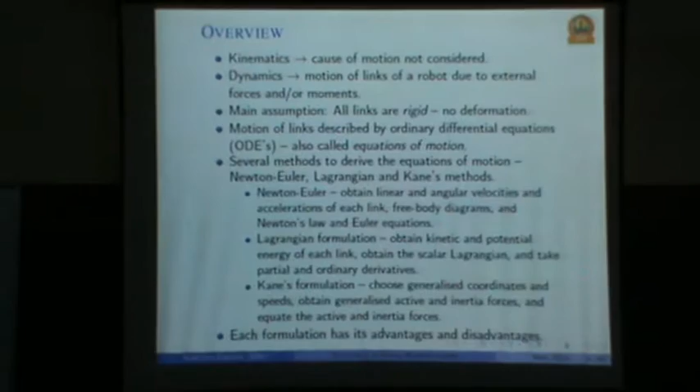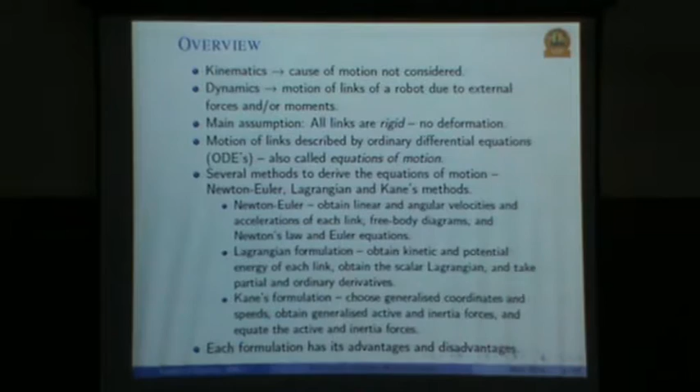Just a little quick introduction. This is maybe a repetition of what Professor Isaac Kurian had also discussed. So in robotics, or like in any other machine design or mechanism design, mechanism analysis and design problems, we first look at kinematics, which is basically looking at how the bodies are moving. We do not really consider what is the cause of the motion. The next important thing is dynamics, in which basically we want to find out, for the links of the robot - since a robot is made up of rigid bodies connected by joints - how the motion of these links changes when some external force or moment is applied.

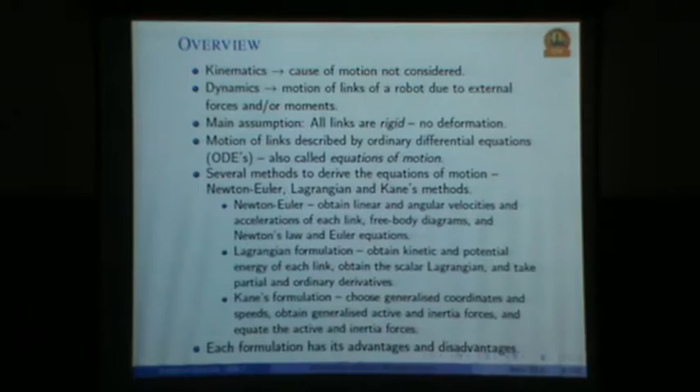The main assumption in this set of talks is that the links are rigid. They need not be rigid, they can be flexible, but then the equations of motion are much more complicated. Once you make an assumption that these are rigid, you will derive what are called ordinary differential equations, whereas if you look at flexible links, something else will happen.

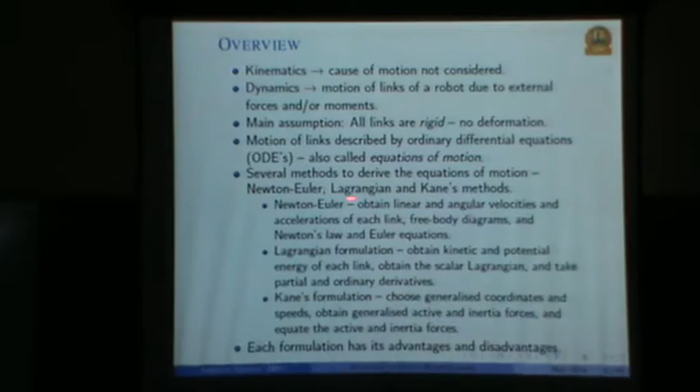These are also called equations of motion, and there are various ways of deriving them: Newton-Euler method, Lagrangian, and Kane's method. In Newton-Euler, basically we look at what we do in high school physics. We draw free body diagrams, find the linear and angular velocity, find forces, then apply F equals ma and the equations of motion. These are called Newton's laws or Euler equations.

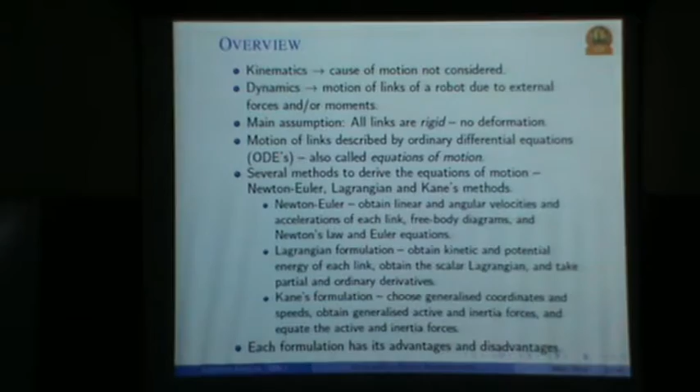Whereas in Lagrangian formulation, this is an energy-based method. We derive the total kinetic energy, maybe the potential energy, various other forms of energy. If you want to include friction and so on, you can do it. The basic idea is that we get a scalar quantity, a single scalar. Then with that scalar, we do a set of steps, like a recipe. We have to take certain derivatives in some particular way and then assemble.

Hence some people find Lagrangian much easier. Whereas with Newton-Euler, you have to find out direction of forces, vectors, velocities, and various things you need to consider. There is also a Kane's formulation, which I don't want to get into. Each formulation has its own advantages and disadvantages. If you were to do Newton-Euler, you have much better idea about the directions of velocity and forces. You can also include friction and various other things which are not so easy in the other two formulations. It can be done, but it is easier in the Newton-Euler method.

So I am going to do only the Lagrangian formulation today. If anybody is interested, we can discuss further. There are lots of textbooks, and it is also available on the NPTEL website.

There are two main problems in robot dynamics. One is called the direct problem, which is basically where we want to obtain the motion of the links given external forces and moments. The other is the inverse problem, which is exactly the opposite. If I give you the motion, if I tell you the robot is moving with so much velocity, so much speed, and rotating and so on, how do I find what the joint torques and forces are?

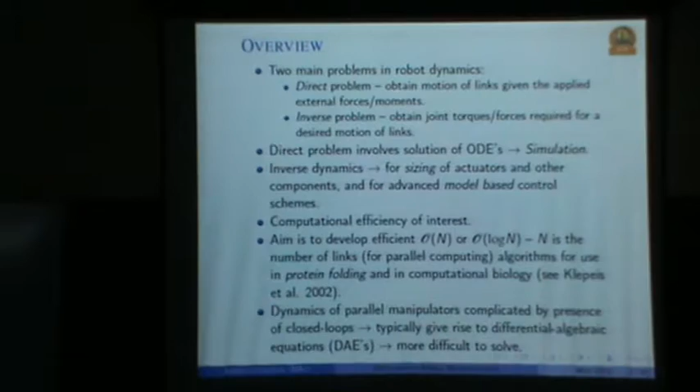The direct problem involves solution of ordinary differential equations. You have to numerically integrate certain equations of motion, because most of the time you can't solve them analytically. You have to use a computer, and this is called simulation. If you want to solve the simulation problem, you have to solve the direct problem.

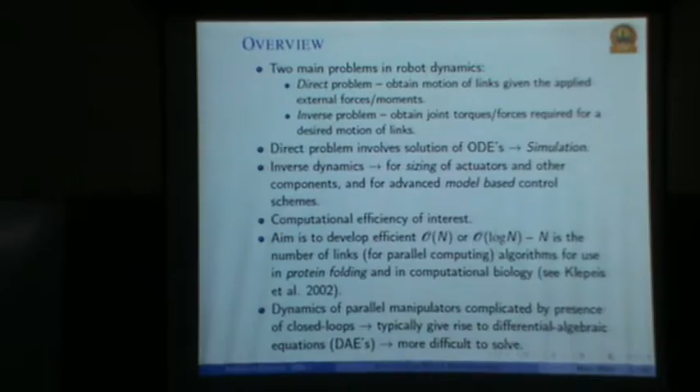Inverse dynamics, on the other hand, is basically used as a design tool. If I know that my robot is going to do such and such task, it has to go pick up, put something in between, attain so much velocity, so much acceleration and so on, then I solve the inverse problem to find out how big the motor should be, how much torque is required from the motors. It is a very useful problem, also used for model-based control, which we will do tomorrow morning. So you can use the inverse problem to do control.

The key interest in all these dynamics problems is computational efficiency. We can get equations, so many equations. The important challenge, which is now more or less solved, is to find out how efficiently you can simulate these equations of motion, how efficiently you can solve the inverse problem. In computer science language, they talk about this complexity. If you have n links, say a 6 degree of freedom robot with 6 links, or a much larger robot with many other links, what is the computational efficiency?

What we are looking for is linear complexity. This means I want the number of computations to increase linearly with the number of links. If I have 6 links, I do so many multiplications; if I have 7, I do so many extra. How does it scale? Linearly. That is what we are looking for.

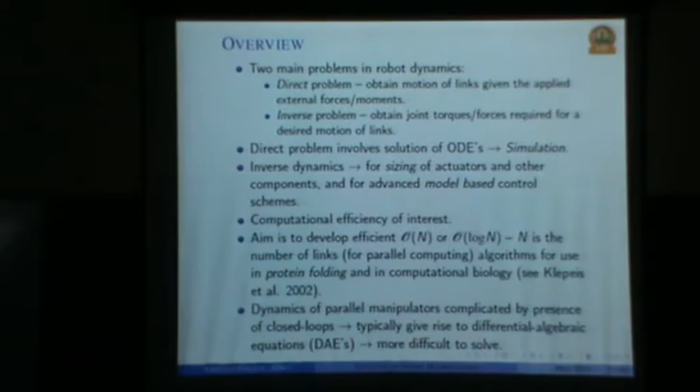You can also do log n, in which case you have to use parallel computing, but we will not discuss that here. I will not discuss this, but just to tell you that everything is not always linear. If you have a parallel robot, which I'm sure will be discussed tomorrow or day after tomorrow, you don't so easily have linear complexity. You also don't have only ordinary differential equations—you get what are called differential algebraic equations, which are much more difficult to solve.

So what do we need to form these equations of motion? One of the most important things is to represent mass and inertia of each of these links—the rigid bodies which make up the robot.

And what is mass? We all know. So if you have some strange shaped link, how do we find out mass? We know the density, we know the volume, and we can find out the mass of the rigid body.

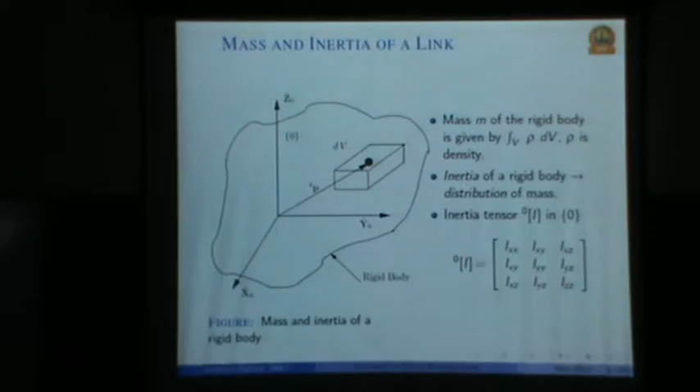Similarly, how do I find out inertia? For inertia, there is a little bit more complication. Inertia is always with respect to a coordinate system. So you have to say with respect to this particular reference coordinate system, I have this Ixx, Iyy—these are all well known, so I'm just repeating it very quickly. There are formulas for Ixx, Iyy, which is well known. For example, Ixx is the integral of y square plus z square dv, and so on.

The important thing to note is this inertia is a tensor. As I said, you need a different coordinate system—if you find the inertia in one coordinate system, let's say with respect to the CG of the object, it will be different if it is with respect to another coordinate system. But every time, it is always a positive definite and symmetric matrix.

So there are reasons—if it were not so, what would happen? You would have lots of problems. If it is symmetric, then you can show that you will have what are called principal moments of inertia, which are also positive. So I can have Ixx star, Iyy star, and so on—these are the principal moments of inertia.

So if you look at the back of some old mechanics book, they will say a rod has half ml squared, or 1 by 12, or 1 by 3 ml squared, or something like that. Those numbers are basically the principal moments of inertia about, maybe, the center of the rod or about some other axis, and we can find that those are always positive quantities.

And how do we find the inertia of an actual robot part? So basically what you do is you see what this robot part is made up of—maybe it's a tube with some holes, or a box with some holes with a motor attached. We can find out the inertia of this entire link with whatever else is there by using some tricks.

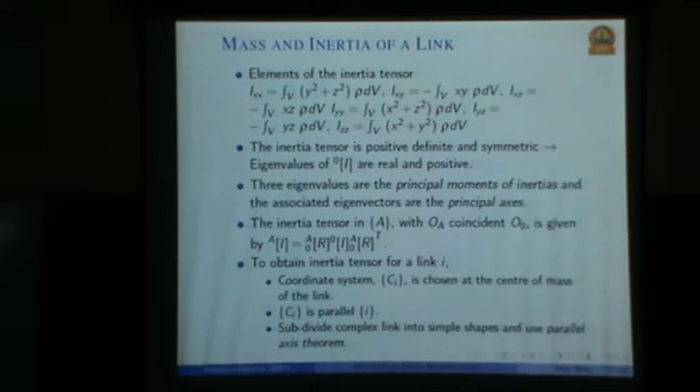Okay, so once you have the mass and inertia, then we can look at how to derive the equation of motion. I'm going to use the Lagrangian formulation, and this is how it goes. It's an energy-based formulation involving kinetic and potential energy.

So what is the kinetic energy for any link, any single link of the robot? It is nothing but half mv squared plus half I omega squared. It's written in this strange form, but otherwise it is just a basic idea of what we do from PoC or even high school.

So we can find the mass of that link, we can find the linear velocity of the CG of that link, we can find the inertia matrix of that link, we can find the angular velocity of the link, and you just compute this.

There are some tricks. Professor Kurian must have told you about how to find the linear and angular velocity of the origin of the coordinate system. So when you go from one link to another link, you can find out the linear and angular velocity.

There are formulas where you can do what are called propagation. If you know the first link, I can find out the second link, from the second link I can find out the third link, and so on. So there are these propagation formulas for linear and angular velocity, but they are for the origin.

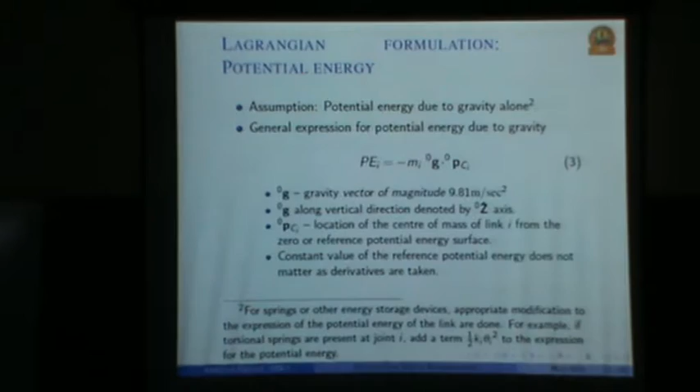And what is this quantity dependent on? It depends on the joint variable. Remember, the angular velocity depends on theta dot if it is a rotary joint. The linear velocity will depend on the velocity of translation at the joint, so some d dot will come in. This is the DH parameter, theta and d, as was discussed.

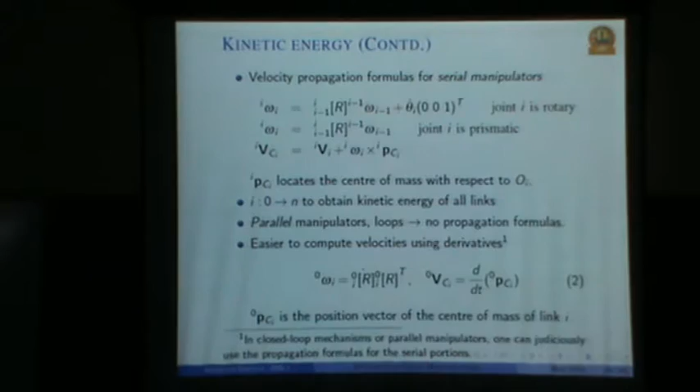So eventually this quantity is a function of q, which is theta and d, and q dot, which is theta dot and d dot, along with mass, inertia, length, and other things assumed constant. So we have a big function here, and n is the number of links.

In a serial manipulator with only rotary and prismatic joints, the number of q, called the joint variable, is the same as the number of degrees of freedom, same as the number of links n, most times - why would you build a robot with no motor or joint? So, the Lagrangian formulation says you do these partial derivatives: dL by dqi, then dL by dqi dot, and then take the time derivative of all these things.

For every link I will get something here, d by dt of something, and on the right hand side I equate it to external forces and moments acting at the joints—these are the joint torques or joint sliding forces. If I do this, I get n equations, since I have n links, i equals 1 through n, and I equate all of these. So it's a very simple recipe.

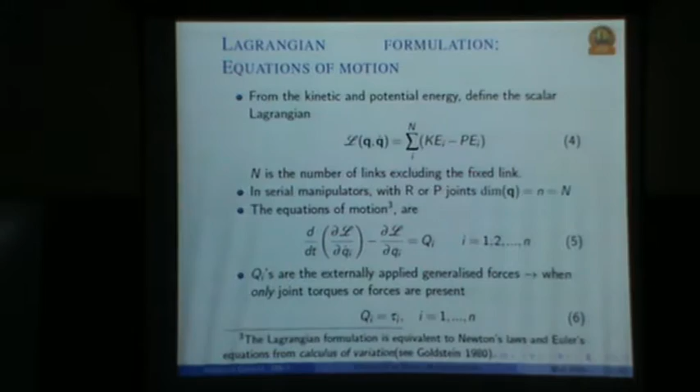So once I have done this for each one of these links, i equals 1 to n, now comes the interesting part. I can organize all these equations in a standard form—all serial robots' equations of motion can be written this way. That is a very nice property of equations of motion for a robot.

So what do we have? I have something called the mass matrix—an n by n matrix—multiplied by q double dot. Q double dot is like theta double dot or d double dot, the second derivative of the joint rotation or joint translation. I also have one term which is a matrix multiplied by q dot.

This is called the centripetal and Coriolis term. If you recall mechanics, you'll have something called omega square r, or 2 omega cross v. These are terms that come from derivatives—when you take omega, the Coriolis term, acceleration—so all the Coriolis and centripetal terms are here.

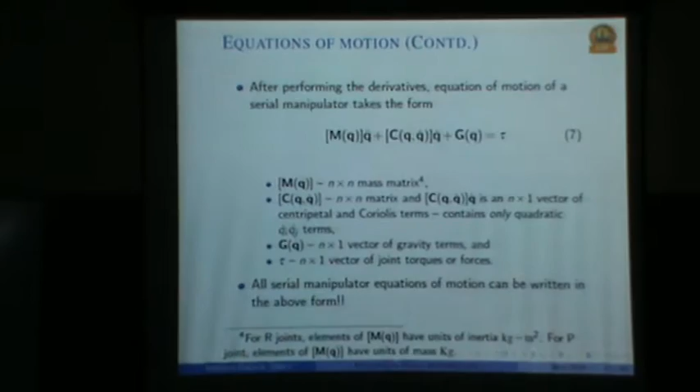This g of q is called the gravity term, coming from the potential energy, and the right hand side is torque. So every single serial robot can always be written in this form—there is no exception. I have an n by n matrix, another n by n matrix, an n by 1 vector, and the torque term.

So now people have worked on this—they know that all equations of motion are always of this form. So if you know all the equations of motion are of this form, why would you want to take all those derivatives? It's a pain—you have to do it by hand, be careful, and make sure the derivatives are done properly. Instead, we can go back one more step.

If you look at the kinetic energy, people have shown it is always in this form. I found the kinetic energy of each link—link 1, link 2, link 3—and added them all up. Then you ask a computer, or write a small program, to collect the terms in this form: q dot transpose into M into q dot. You collect and remove all the theta double dot or theta dot terms and write the kinetic energy this way, and this mass matrix turns out to be the same as the one derived earlier. So I don't have to go through all those steps—directly from the kinetic energy, I can find the mass matrix.

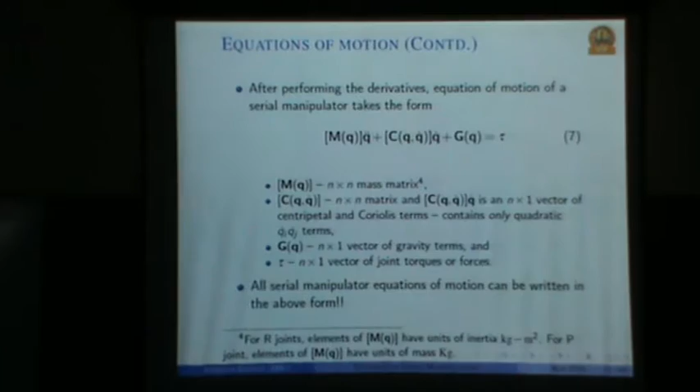And the gravity term is nothing but take the total potential energy and take the partial derivative. So without doing the d/dt and so on and assembling it, directly from the kinetic energy and directly from the potential energy, I can find out the terms in the equations of motion. And this is true for all serial robots. It is not just for 2 link or 5 link, it could be 200 links also, doesn't matter.

So in math, if you have done any advanced course in math, this is a very important part in what is called differential geometry. So in differential geometry of curves and surfaces, you will get these Cij terms. These are called Christoffel symbols. So somehow geometry and math and dynamics are all related in some sense.

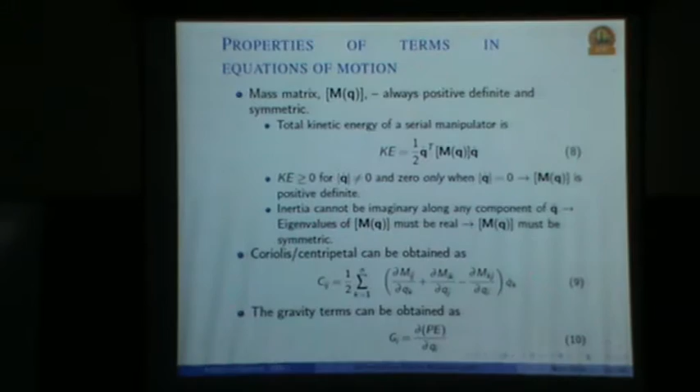Just very little, I don't want to go into too much detail because Professor Madhupad will do all these things tomorrow. If you are doing parallel robots or mechanisms, you can extend this Lagrangian formulation to derive equations of motion for those also. Because it doesn't make sense that I have only one formulation for serial robots which does not work for parallel robots. Then people will say, what is the use? It is too narrow and focused.

So if you have a parallel robot or a mechanism, you get what are called loop closure or constraint equations. In a 4-bar mechanism, you go around the loop and come back to the same place. That is called a loop closure equation or constraint equation. So if you have m constraint equations, you can extend the Lagrangian by taking the old Lagrangian and subtracting this quantity lambda j into eta j q. From the loop closure equations, multiplied by what are called Lagrange multipliers, you subtract it, and then you get a new Lagrangian, and again you can take all those derivatives and find the equation of motion. This is a nice way because it is extendable.

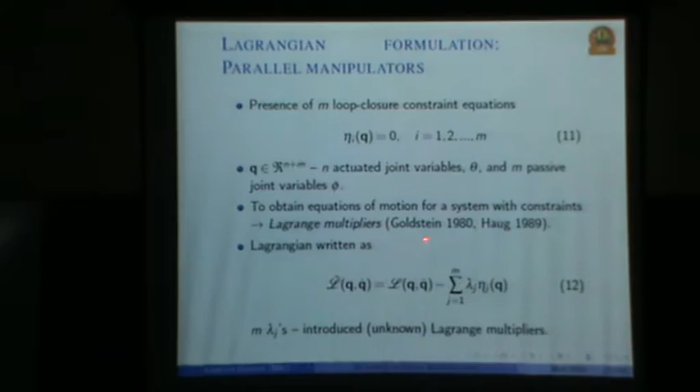Those of you who are interested in Lagrange multipliers, their properties, and how we can derive the new Lagrangian, you can go back and see some very well-known standard textbooks.

Once you have the equations of motion, again you do all these things, and what you will get is the left hand side looks very similar, the right hand side, one part is very similar, but then one new matrix will come which is related to the constraint equations. Some of these slides are taken from the NPTEL lecture, where I also discuss serial and parallel robots at the same time, because it's a unified way of looking at everything. So don't worry what is K and K star, they come from the loop closure constraint equations. You can find out what this K and K star are from this, assemble them together, and you have to add one additional term for parallel robots.

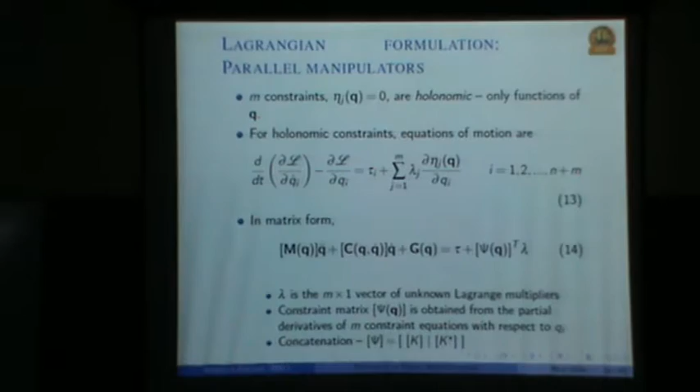I'm going to skip this for the moment. We can come back to it a little later.

So basically, the summary in serial robots is that I can find the equations of motion, and I can extend it to what are called holonomic constraints and loop closure equations.

What are the problems in Lagrangian formulation? We should know the limitations of any method. One important thing is it does not contain friction or any other dissipative term, and that is because Lagrange was a very famous mathematician. How many of you know who Lagrange is? He is from the time of Newton, Lagrange, Euler and so on.

In those days they were working on how the planets move around the sun. All of this comes from orbital mechanics and planetary mechanics. So what is friction there? If the Earth is spinning around the sun and rotating, there is nothing to do with friction as such. So there was no way to include dissipative terms.

But we need friction. In a robot, every joint, every motor has some friction in it. Otherwise the robot will move around forever. We give some voltage and it should keep on moving - that doesn't make sense. So how do we modify this very nice formulation to include friction?

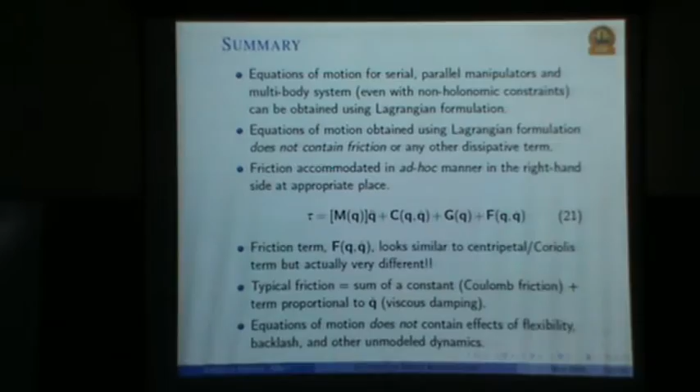It also does not contain anything to do with flexibility, backlash, or any other dynamics which you have not modeled. It is a very basic system for a conservative system where kinetic energy and potential energy are there, and nothing else. So if the robot is moving inside water, how will you model the force felt by the robot when it is dragged? You can't - you have to add it manually in an ad hoc manner.

Or if there is a gearbox in your robot and the gearbox has backlash - meaning you rotate one way and it rotates, but when you go back, nothing happens for some small angle - how will you model that effect? You can't. The normal Lagrangian formulation does not allow you to take into account all these things. You have to do it manually.

So I am going to stop here about this formulation. Is there any question? Then we can go forward and look at some examples and simulation, which will be much faster.

In which cases do we have to take the viscous damping? Yes, so if you want to include friction - viscous damping, Coulomb damping, any other kind of damping - you just have to add it to the right hand side.

Is this clear? Very basic, but I thought I'd give you some basic idea which can be extended. There are lots of books and notes you can go through in detail. So let's go and see some examples.

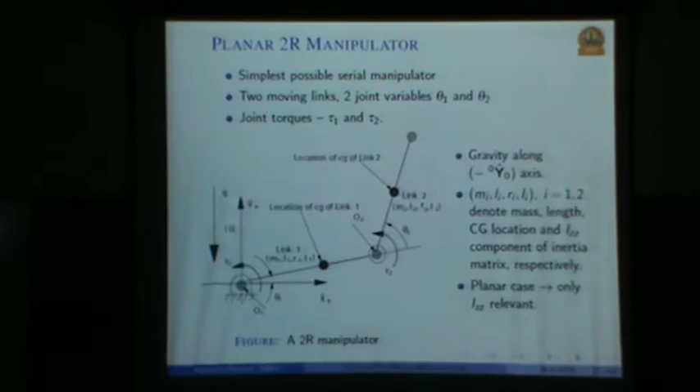What exactly happens when you apply this formulation to a simple robot? What is the simplest possible robot? This is what we do in class, because in a class I cannot draw a 6 degree of freedom robot and derive its equations of motion. If I start in the morning, it will take about 3-4 hours, and everybody will fall asleep.

So the simplest possible robot is this 2 degree of freedom robot, with one link here and another link here. Each link - for example, link 2 - has mass m2. The location of the CG is at R2, the length is L2. This is a planar example, meaning the links move in a plane. So if the links are moving in a plane, then only the IZZ component is important.

There is no need to worry about IXX, IXY and so on - only the IZZ component is important. So I2 is IZZ2 of this link. Similarly, for the first link you have M1, L1, R1 and I1.

So let's try and derive the equation of motion for this simple 2 degree of freedom planar robot. If you go back and see, this link, what is the angular velocity of this link? It will be related to theta 1 dot, right? This link is rotating by some theta 1. What will be the angular velocity of this link? It will be related to theta 1 dot and theta 2 dot.

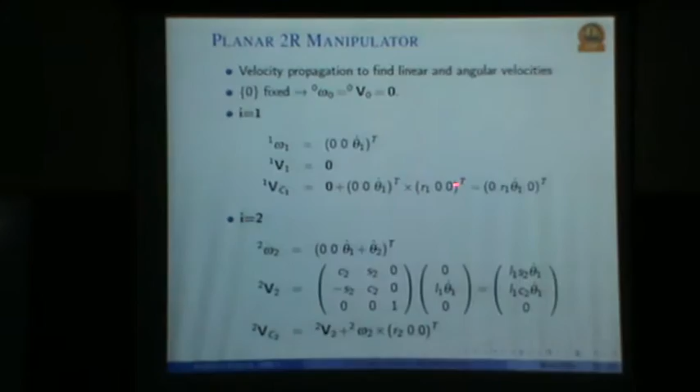The origin is here, of the links. In DH convention, the origin is always at the joint axis, it is not at the CG. So linear velocity is still 0. What about the linear velocity of the center of mass? It is 0 plus omega cross r, whatever I told you, and you will get this term.

For i equal to 2, what happens? Angular velocity will become theta 1 dot plus theta 2 dot. Linear velocity is this, and linear velocity of the center of mass is this plus omega cross r. It's very straightforward, it is automated. Then kinetic energy: if you derive it, it is half v1 squared m v1 squared plus half I omega squared plus half I2 omega squared plus half m v2 squared. These are the 4 possible terms, and it turns out that you will get this.

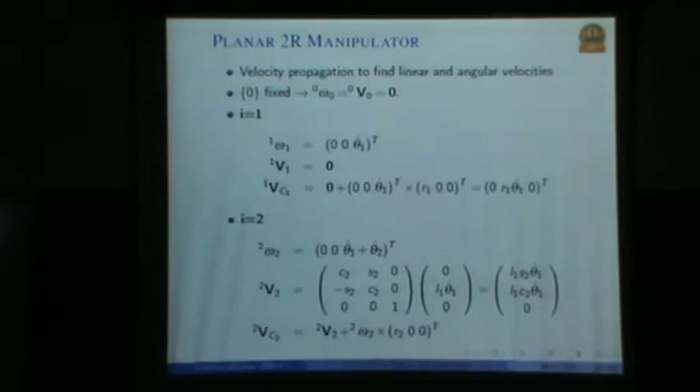So what is the key thing here? Theta 1 dot is there, theta 2 dot is there, but also C2, meaning cos theta 2, will appear. Why is cos theta 2 appearing? Let's go back to this. If theta 2 is such that this link is folded here, then the linear velocity of the link will be much smaller than if it is folded completely outside. So the linear velocity of the center of mass changes with theta 2, which you can see here, and that comes out in this expression.

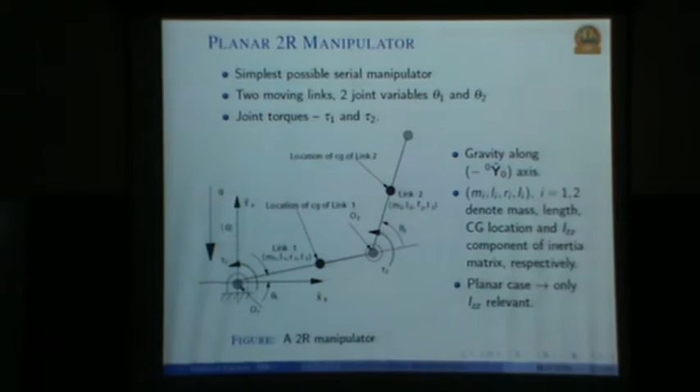Potential energy: let's go back and see this. This is 0, this height which is r1 into sine theta 1, and this height from here to here which is sine theta 1 plus theta 2. So you will get something which is in terms of sine, whereas the kinetic energy has cos. That is all I wanted to point out. So you will get some mgh plus mgh and so on.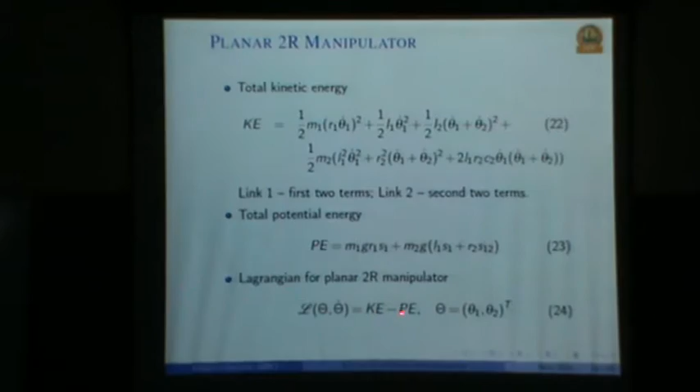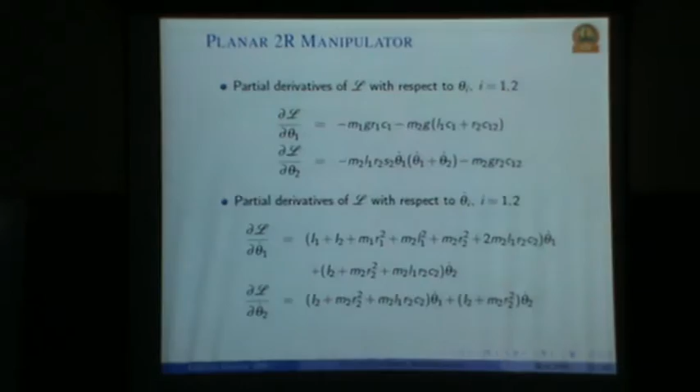So once we find the kinetic and potential energy, we form the Lagrangian. This is very straightforward, and then you take all these derivatives. This is very mechanical. If I take the derivative with respect to theta 1, I will get this, theta 2, theta 1 dot, theta 2 dot, I will get this, and then d by dt you get this, and then finally assemble. How do I assemble? I assemble keeping in mind that finally I want to write m into theta double dot plus c plus g.

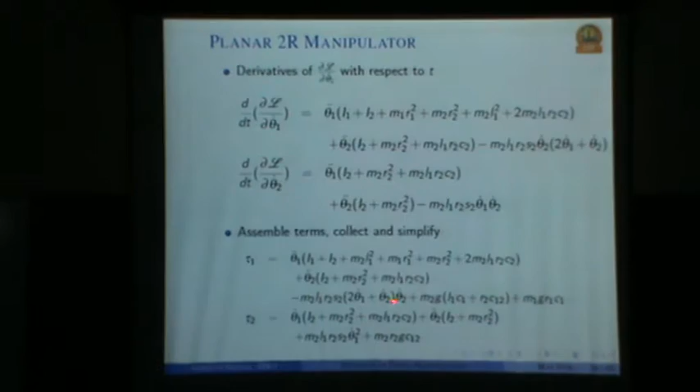If you were to write this, I will get theta 1 double dot into something, theta 2 double dot into something. These are the Coriolis terms. You will get something like theta 2 dot squared, and something like theta 1 dot into theta 2 dot. Similarly for tau 2. So this is the equation of motion. It's very straightforward and simple. You can derive it in class and show it.

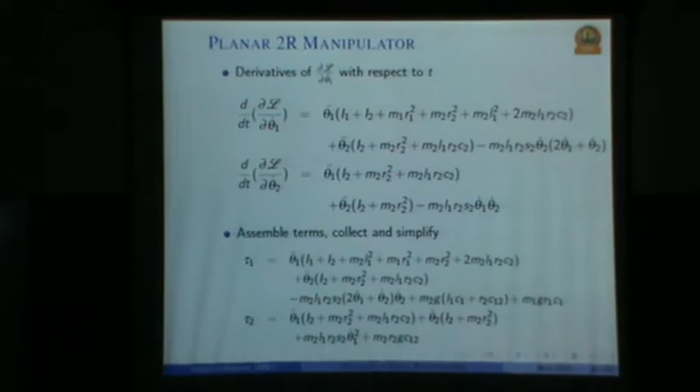And you can organize it this way, and show that this is the mass matrix, this is the centripetal term, this is the gravity term, and so on. No friction is there because the friction was not modeled.

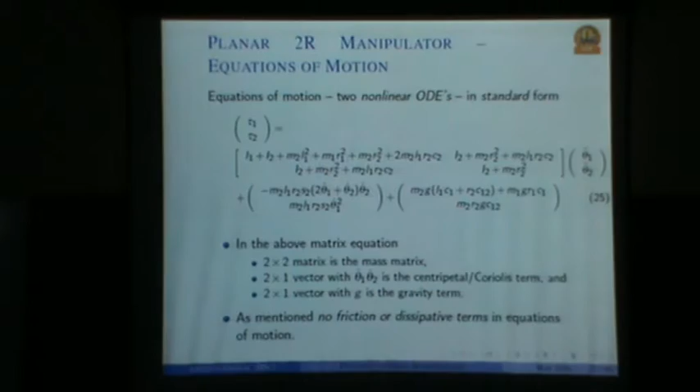So what do we do with this equation? There are two problems which we want to solve. We want to find out, given the torque—in this case the two motor torques tau 1 and tau 2—how the robot moves. Or secondly, if I give a path, find out how much torque is required to make it move on that path. That is called inverse dynamics and simulation.

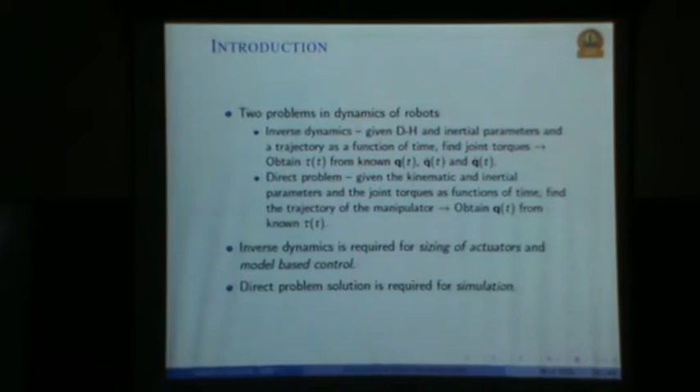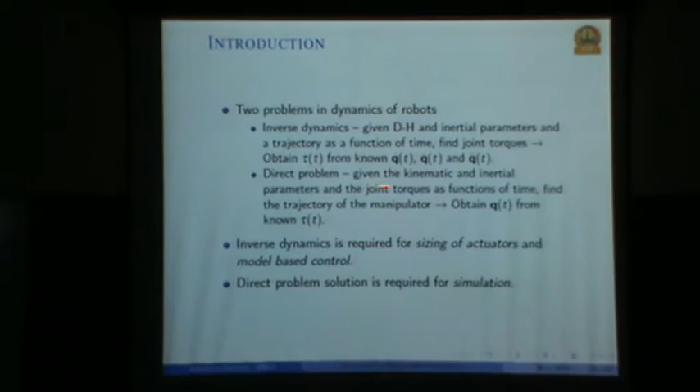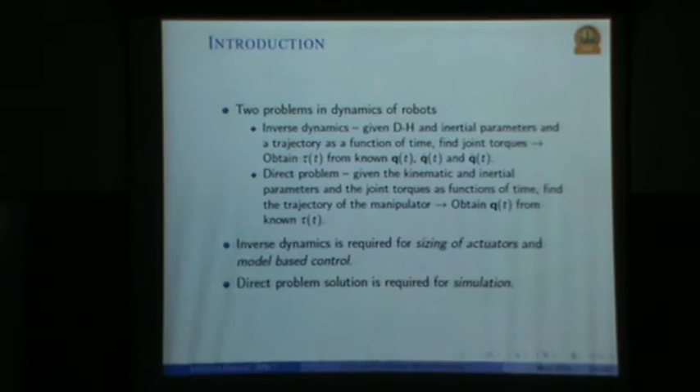So let's try that. Inverse dynamics: rephrase the problem. Given DH and inertial parameters, and the trajectory as a function of time, find the joint torques. Direct problems: given kinematic and inertial parameters, obtain q of t from this. So this is, as I repeated right in the beginning, this is for finding out what size motors to use, and this is to show actually how it moves.

Inverse dynamics is very simple. Why? Because you are given q, q double dot, q dot—everything—the right hand side is just given. As I said, the trajectory is given. I want to move the first joint at constant velocity, the second joint in some particular form, and hence I know exactly what q as a function of time is, theta as a function of time is. So all you do is just substitute and put it on the right hand side, and you quickly get the torque.

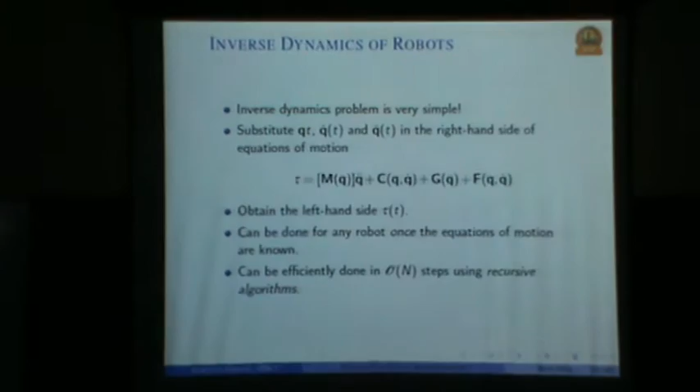And as I said, I can do this very, very efficiently. You can do it in O(N) steps, and you can prove that for inverse dynamics, the Newton-Euler formulation has a nice proof which says that it is always O(N) steps. It's a linear complexity problem for a serial robot.

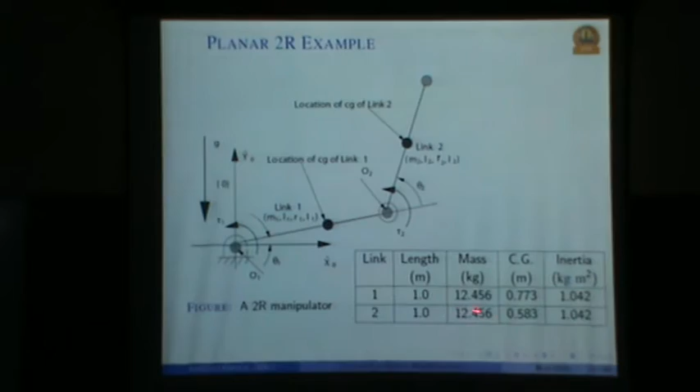Okay, so let's take an example. Here are some numbers. Now you have to use some numbers: the length of each link is 1 meter, mass is 12 kg. This 12 comes from the fact that there was actually a robot which was built. The first link of a robot is normally quite heavy, and its inertia is quite big, and so on.

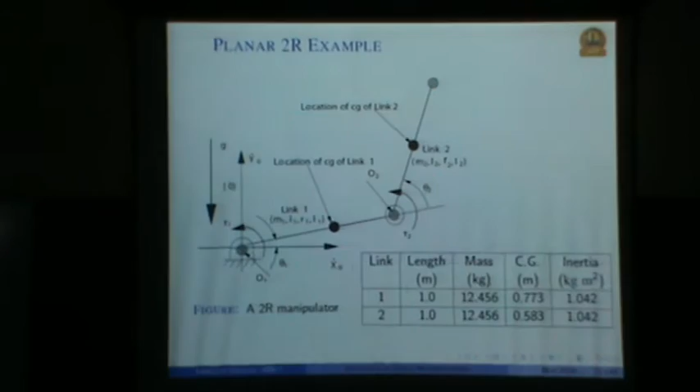So if I want to trace the tip of this robot on a circle, let's say I choose x as some a plus r cos phi, y as some r times this, and so on, and I want to make this robot trace this circle constantly in some time. You have to choose some numbers right now. So I want to know, for this particular trajectory, what are tau 1 and tau 2.

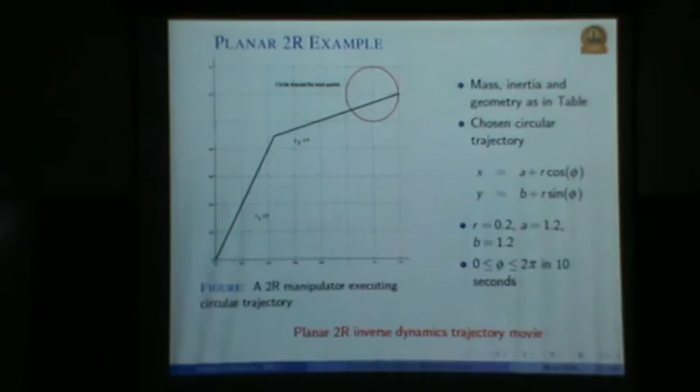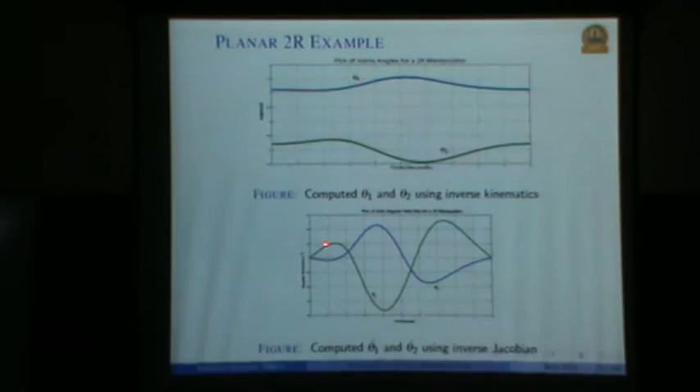So I can just substitute on the right hand side and then we get this. Here is the plot: theta 1 as a function of time is this, theta 2 as a function of time is this, theta 1 dot as a function of time is this. These are given to you, and then this is what torque you will get. So if my robot's job was to trace this circle in this time, what should the motor torque be? We can say it should be at least this value—the motor should be able to deliver at least this many Newton meters.

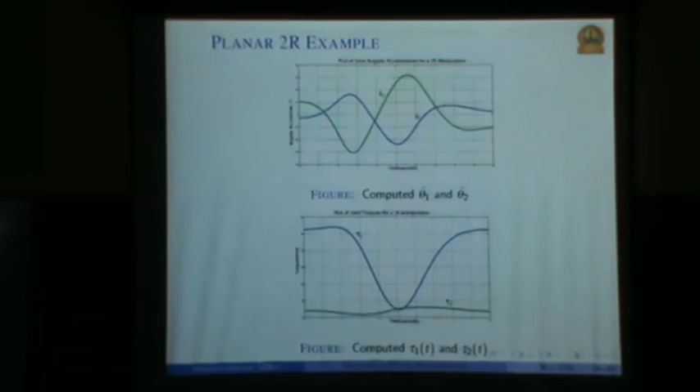So this is very straightforward. Inverse dynamics, nobody worries about it—you just substitute. And how about simulation? It's a slightly harder problem because now we need to solve equations of motion.

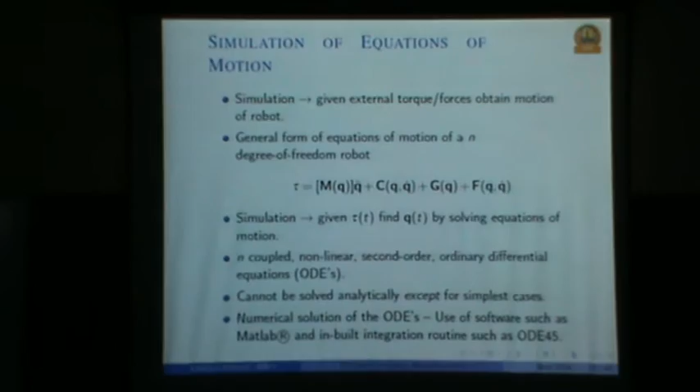Because in simulation, what happens? The left hand side is given to you—the torque. So you are saying I am applying so many Newton meters of torque at the first joint, so many Newton meters of torque at the second joint, and I want you to tell me what the robot does. I will show you some videos later on—it will not work if I click right now. So I have to solve these equations of motion.

So how do you do it? Basically it's a set of n second order coupled ODEs. These are nonlinear—you saw that there was theta 2 in one of the terms, there was sine theta 2, cos theta 2. It is not a constant equation; the coefficients are not constant. The coefficients are functions of theta.